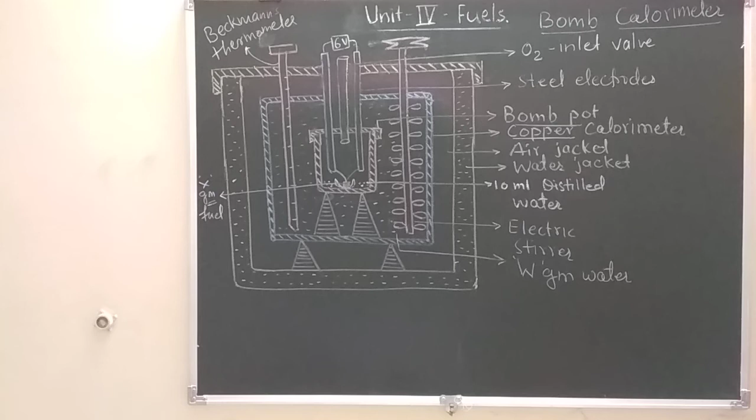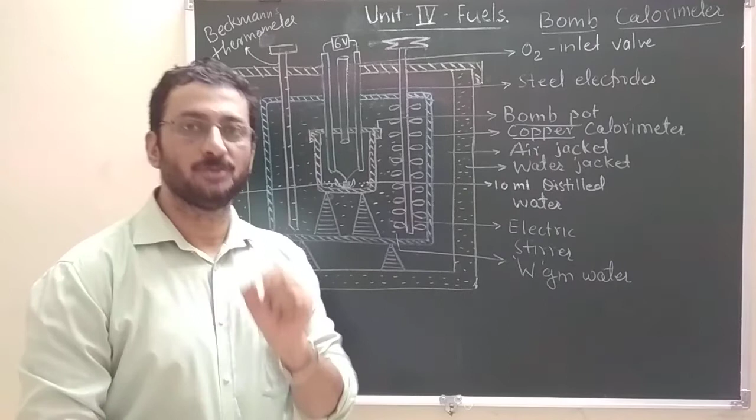After calorific value, the next topic is measurement of calorific value. This is one apparatus called the bomb calorimeter. Calorific value of solid fuels and non-volatile liquid fuels can be measured with the help of a bomb calorimeter. This is a rough construction of the bomb calorimeter, which is the correct construction, but not to scale.

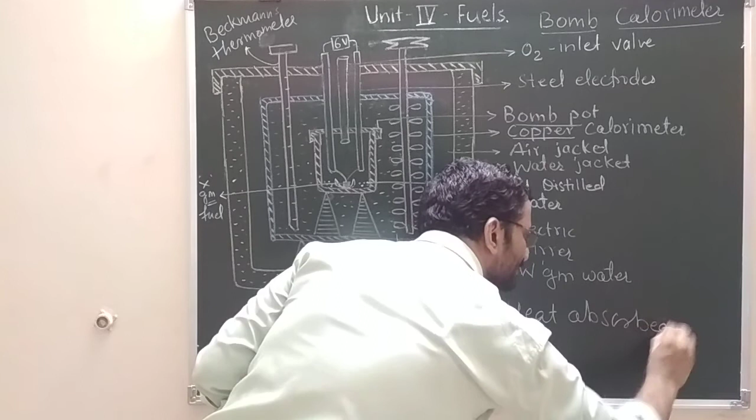Let us see the main components of the bomb calorimeter. Before that, what is the basic idea of measurement of calorific value? The basic idea is: heat liberated. Who is liberating heat? Some known mass of fuel will be liberating heat in this experiment. It will be equal to heat absorbed. We will see that part. In this lecture we will be studying the 6 marks short note on bomb calorimeter.

Let us see the construction first. Main components of the bomb calorimeter: this is the central component, this is the second envelope, blue color, and this is the third envelope. This central compartment is called the bomb pot. This is a stainless steel pot, which withstands high temperature and high pressure. In this bomb pot there is a place to keep a crucible, a steel container.

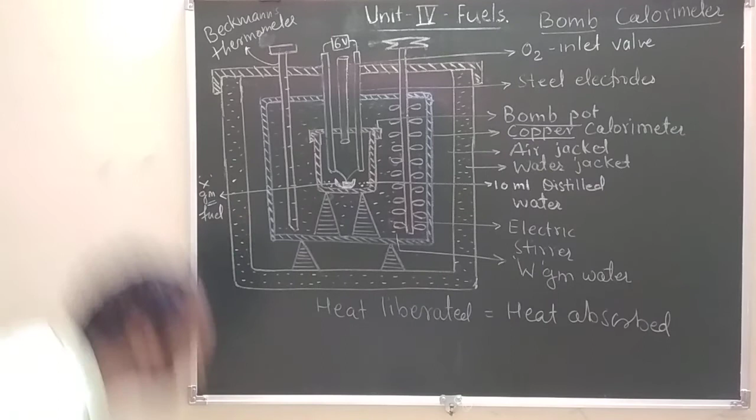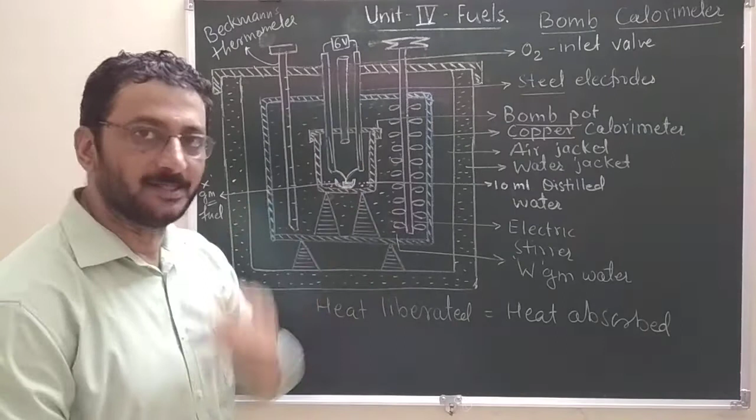In that container we have taken a known mass of fuel, say X gram of fuel. This fuel sample is connected to these two steel electrodes via fuse wire. So in a bomb pot, which is a small steel container, there is a place to keep a crucible. In that crucible we are taking a known mass of fuel, say X gram of the fuel.

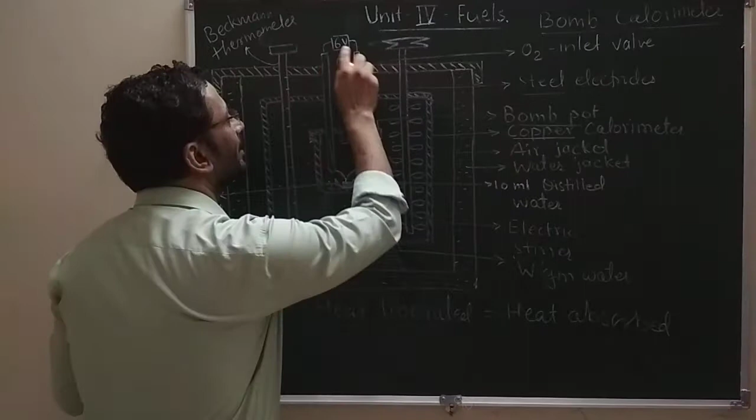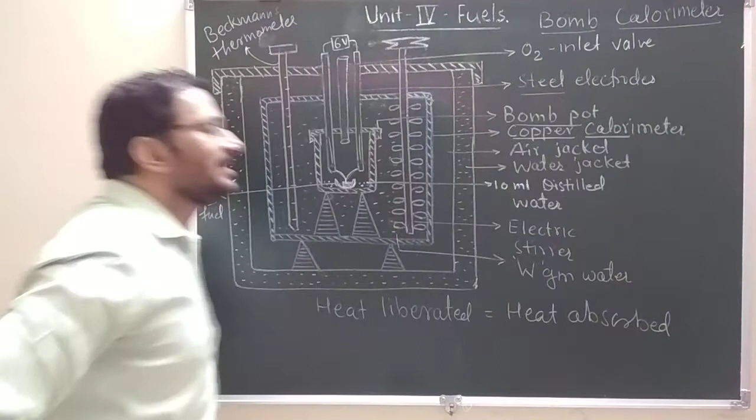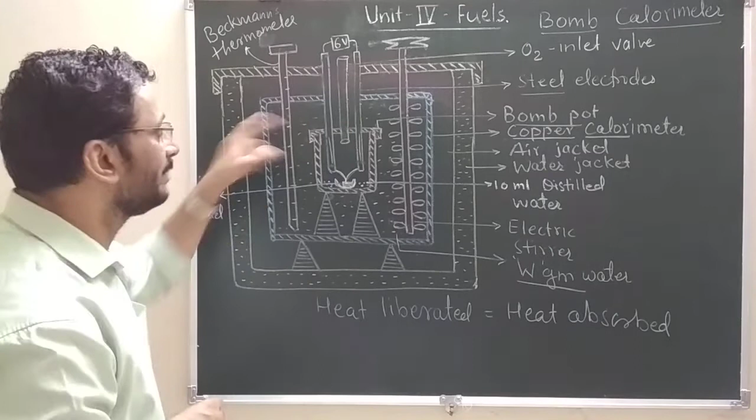This fuel is connected to steel electrodes via fuse wire, and these steel electrodes are joined to the battery, a 6-volt battery. This bomb pot is immersed in the second compartment, the second envelope, called the copper calorimeter. This is a copper container. This copper calorimeter contains, suppose, capital W gram of water. A known mass of water is kept in the copper calorimeter, in which you have immersed the bomb pot.

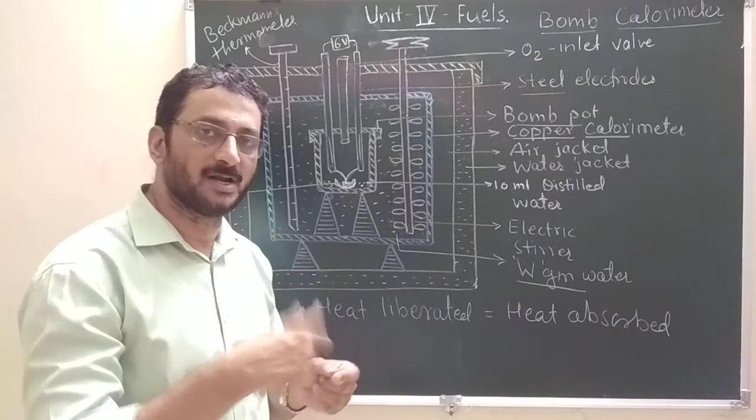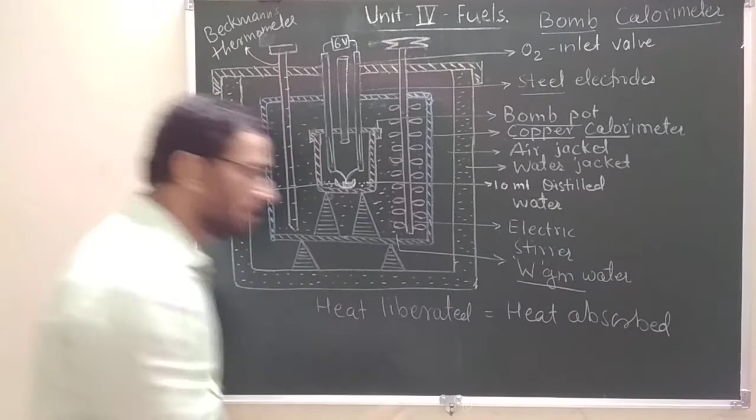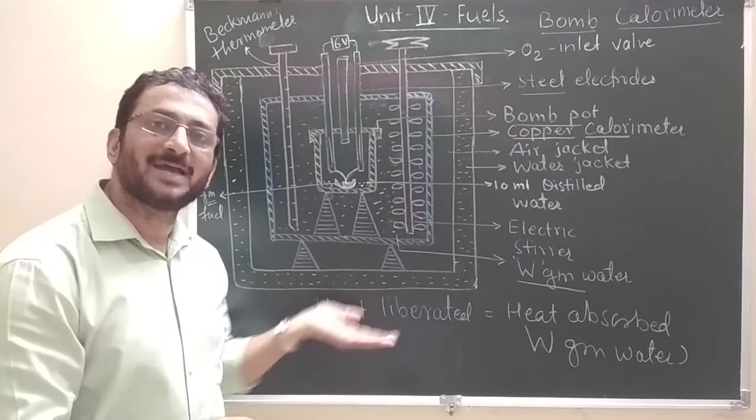So when you pass current from this battery via electrode and fuse wire to the fuel sample, the fuel sample will catch fire and start burning. On its combustion, a certain amount of heat will be liberated. Here X gram of the fuel is liberating heat. This liberated heat will be absorbed by capital W gram of water. By absorbing heat, there is some rise in the temperature, which will be recorded by this thermometer.

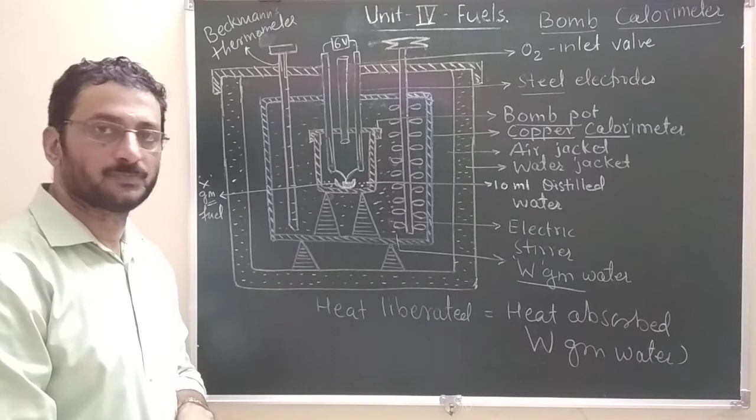This is a Beckmann thermometer that is used to record the rise and fall of temperature. By absorbing heat by the water, there is a rise of temperature. We will record the minimum temperature, suppose T1, say 25 degrees centigrade, and the maximum temperature, suppose 72 degrees centigrade. So minimum to maximum will be recorded.

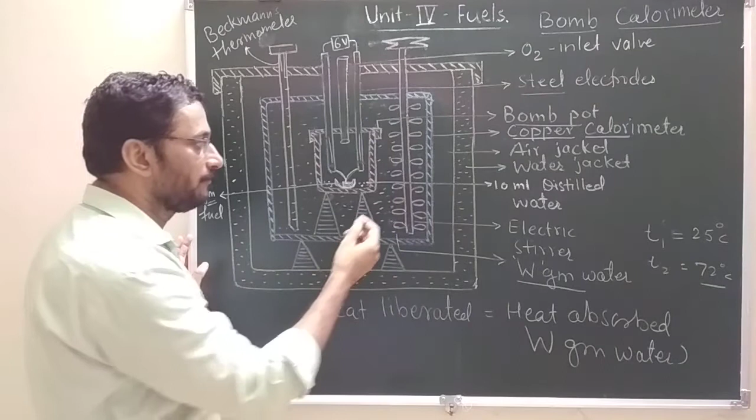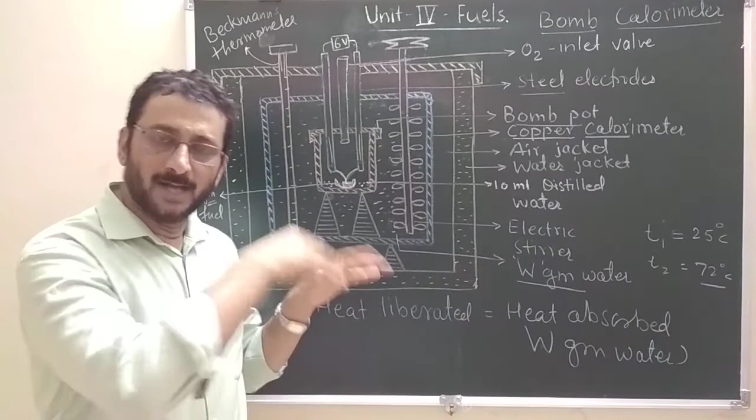In this copper calorimeter there is an electric stirrer for uniform stirring of the water. And there is an oxygen cylinder for proper smooth combustion, supplying oxygen at the given pressure. The copper calorimeter is enveloped by an air jacket and then a water jacket. The copper calorimeter containing W gram of water, which absorbs heat from combustion of the known mass of fuel sample, is covered by the air jacket and water jacket to avoid heat loss by radiation.

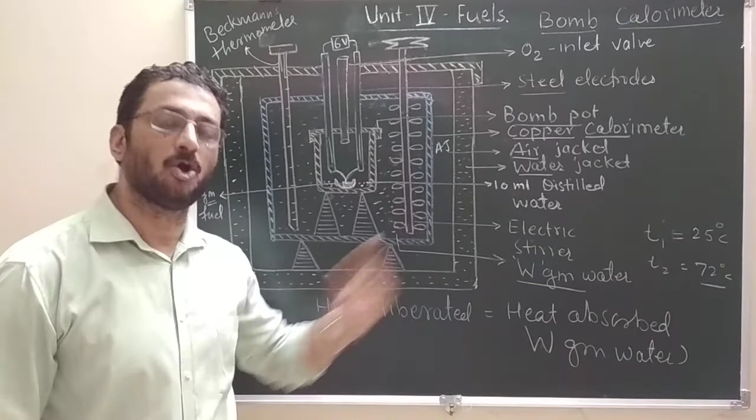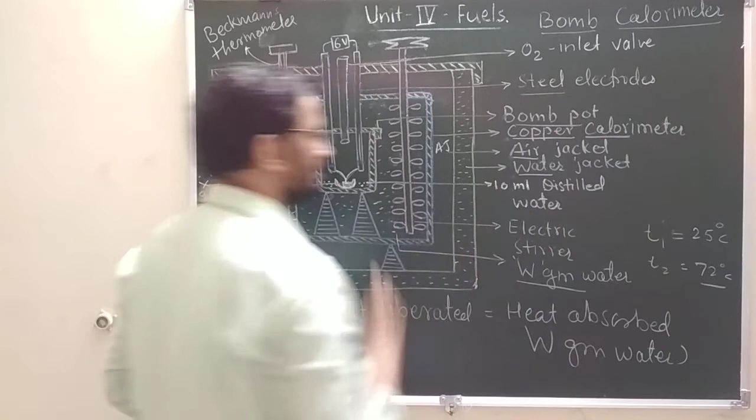This is a rough construction of the bomb calorimeter. The main components are the bomb pot, copper calorimeter, air jacket, and water jacket. Then there are the fuel sample, electrodes, oxygen cylinder, thermometer, electric stirrer, and so on.

One more important point: in the bomb pot where you have kept the fuel sample in the crucible, we have taken 10 ml of distilled water, because when the fuel sample contains sulfur or nitrogen, during combustion it will form the corresponding oxides of sulfur and nitrogen.

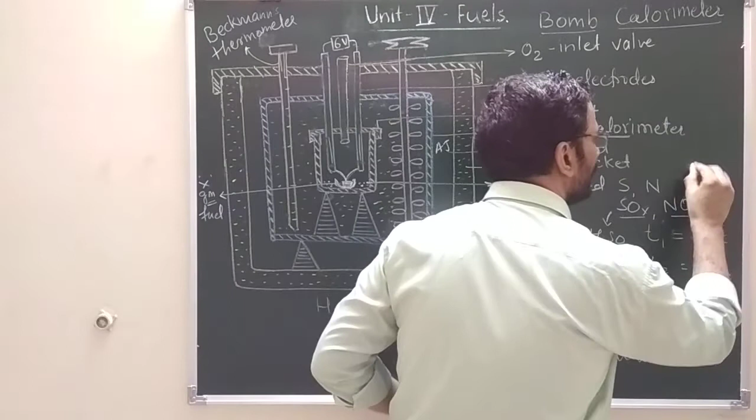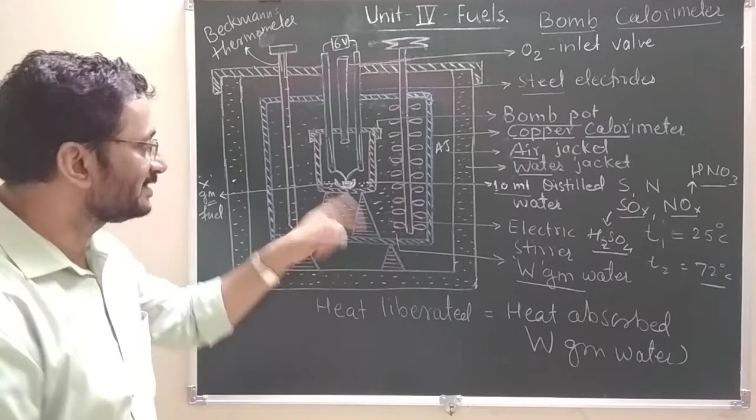Okay, these oxides get dissolved in this water and they will form corresponding acids like sulfuric acid, or with water it will form nitric acid, and so on, right? So formation of acid is an exothermic reaction. Formation of acid due to presence of sulfur and nitrogen in the fuel is an exothermic reaction.

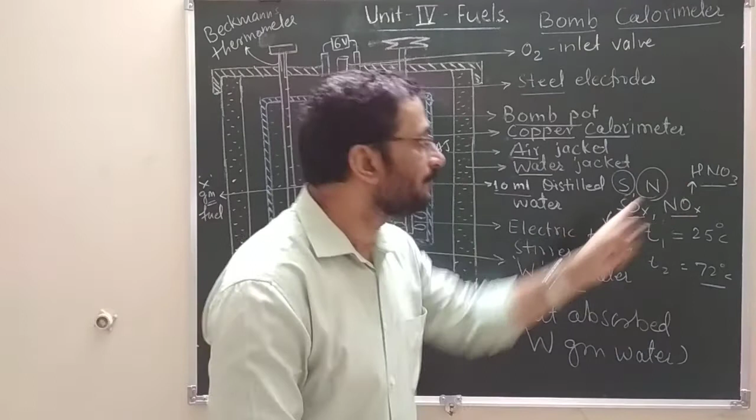Heat will be liberated, but that heat is not because of the burning of the fuel sample. That will be because of formation of acid from sulfur and nitrogen. We will record this afterwards. So for that purpose 10 ml water is kept. What is the purpose? This 10 ml water is kept in the bomb pot, and if the fuel sample is containing

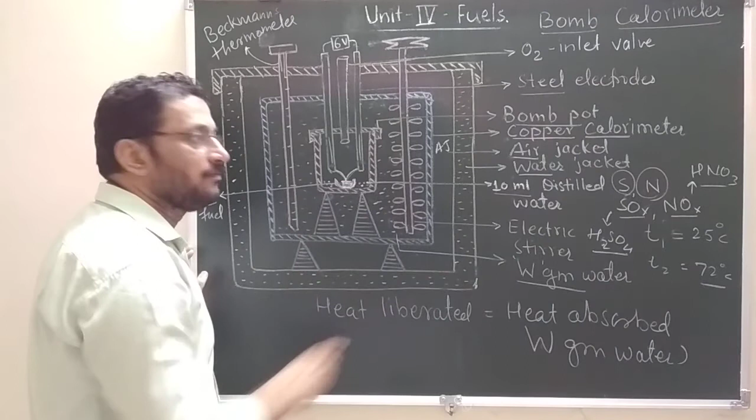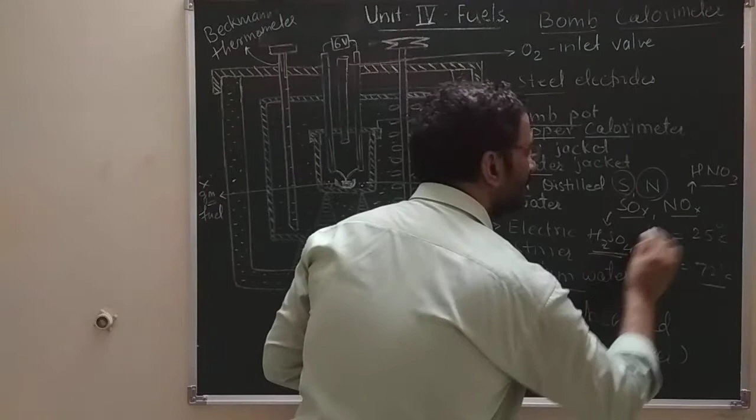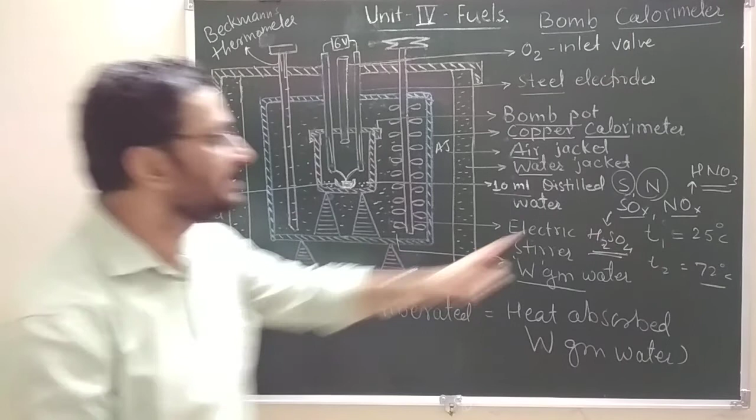sulfur and nitrogen, on combustion of the fuel sample, they will form corresponding oxides. These oxides get dissolved in the water and they will form corresponding acids, right? Formation of acid is an exothermic reaction, so a certain amount of heat will be liberated. That heat is not because of the burning of the fuel sample, that is because of these two components, or formation of acid actually. Fine.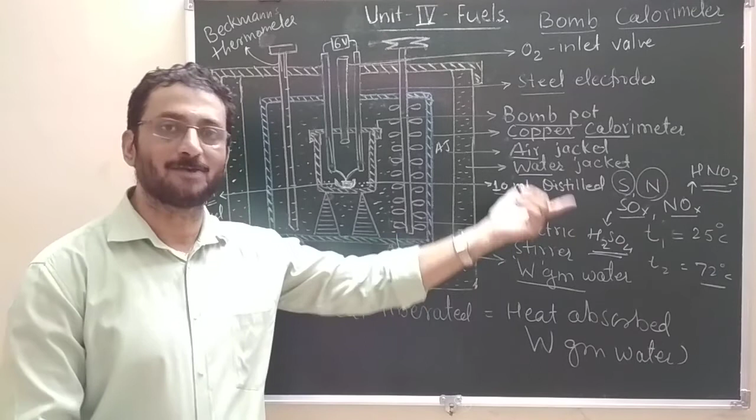So that part we will be taking in the calculation part. We'll see afterwards. So this is the construction of the bomb calorimeter. Fine. Now see the working of the bomb calorimeter.

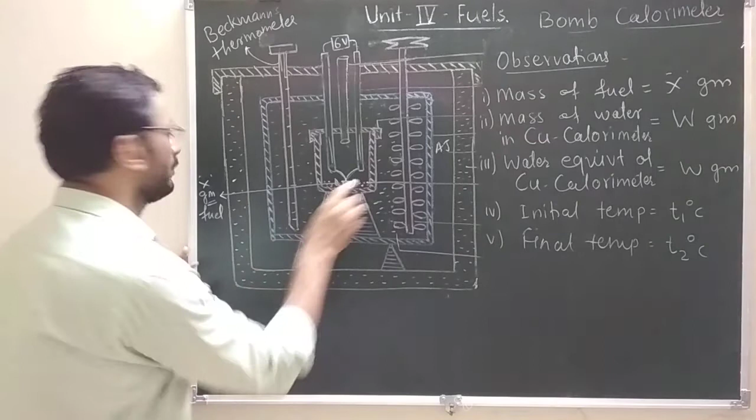Okay, we will arrange the assembly like this. In a bomb pot we will take x gram of the fuel and 10 ml water. We will immerse the bomb pot in a second compartment, that is the copper calorimeter. In this copper calorimeter we have taken a known mass of water, that is capital W gram. We will arrange the thermometer and electric stirrer, and record the initial temperature.

Okay, now we will pass current for a few seconds, that will reach the fuel sample via the fuse wire. It will start combustion. There will be generation of heat. That heat will be absorbed by this capital W gram of water kept in the calorimeter. There will be a rise in the temperature of this water, which will be recorded by the Beckmann's thermometer.

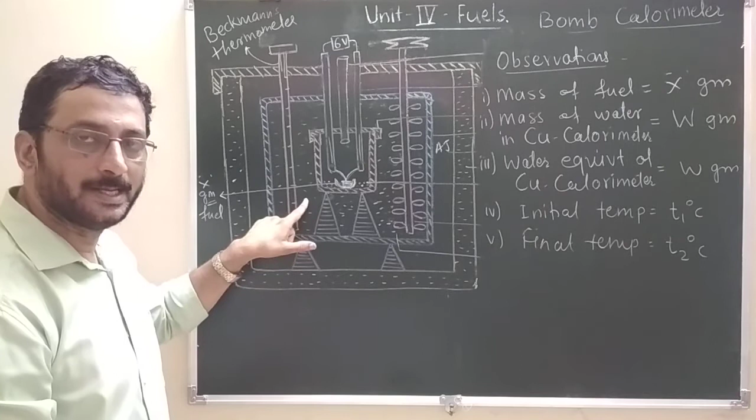From the mean rise of temperature of this capital W gram of water kept in a copper calorimeter, by doing a simple calculation, we can easily find out the calorific value of the fuel. For that purpose we have to record our observations.

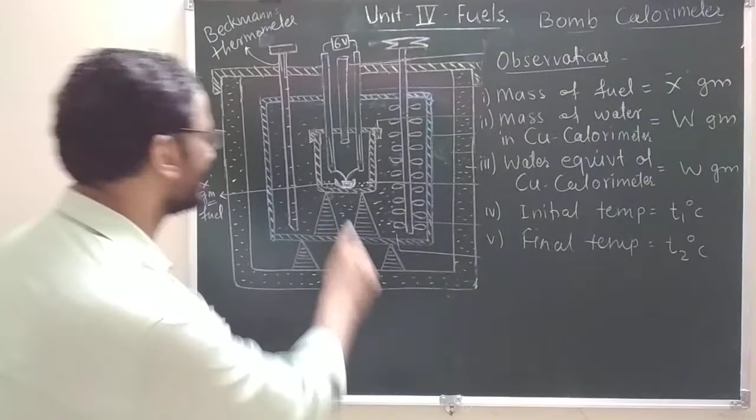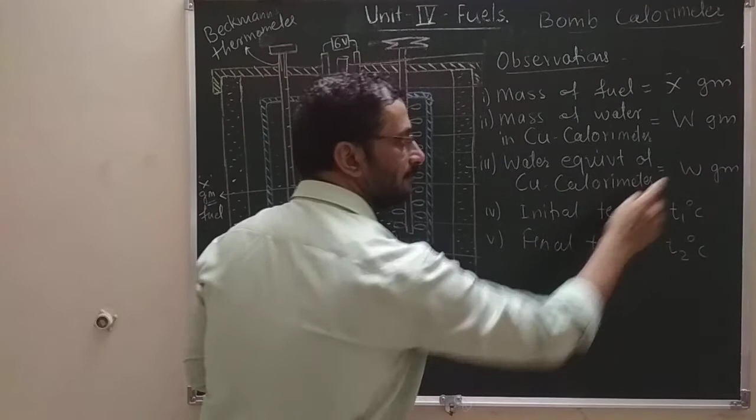What are the observations? Mass of the fuel kept in a bomb pot is x gram. Mass of the water kept in a copper calorimeter is capital W gram. Water equivalent of copper calorimeter is small w gram. We'll come to that. Initial temperature, suppose T1, that is room temperature. Final temperature, maximum temperature, is T2 degree centigrade.

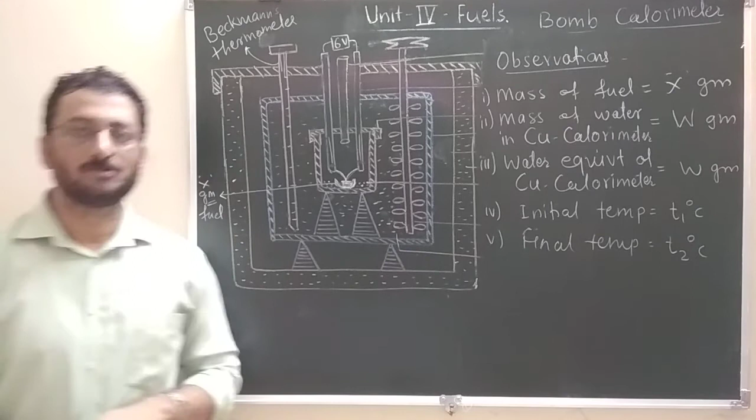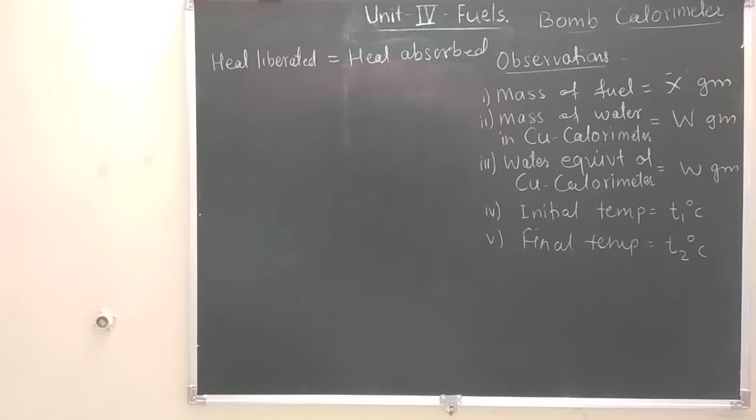From these observations, by doing a simple calculation, we can easily find out the gross calorific value of the fuel sample. Okay. Now, after these observations, see the calculation part. What are the observations? Mass of the fuel taken is x gram. Mass of water kept in a copper calorimeter, which is going to absorb heat, is suppose capital W gram.

Water equivalent of calorimeter. What is this water equivalent of calorimeter? Apart from the water kept in a copper calorimeter, the other components of the apparatus may also absorb heat. Maybe the copper container itself, a metal part, it may be the electrical stirrer, it may be the bomb pot and so on. So that factor is taken as the water equivalent of copper calorimeter.

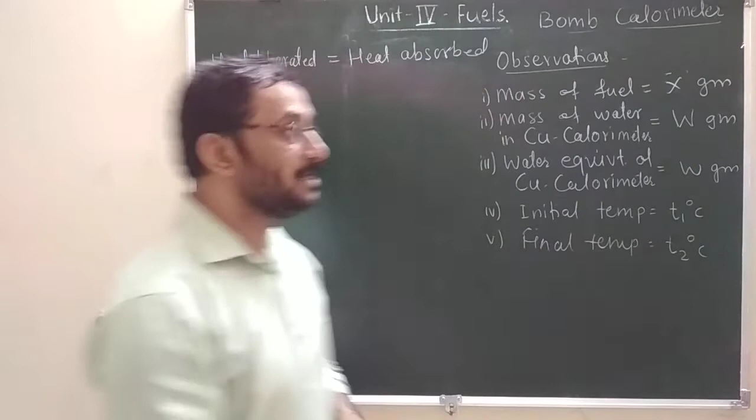How to record this? Mass of the apparatus which is absorbing heat into specific heat, that is recorded as small w. That we have to take into consideration, because the rise in temperature is because of heat coming from the fuel sample, and this is the initial temperature and final temperature.

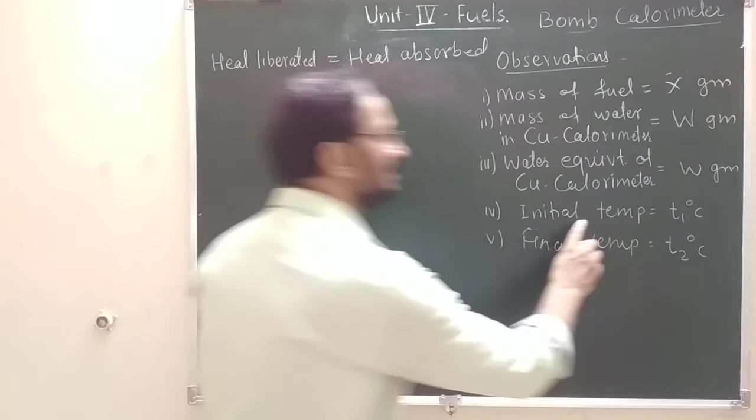Before going to the calculation part, see the basic principle of the bomb calorimeter. The basic principle is heat liberated by a known mass of fuel is equal to heat absorbed. And from the mean rise of temperature we can find out the CV. One more observation is our GCV. Suppose the GCV of the fuel is theta.

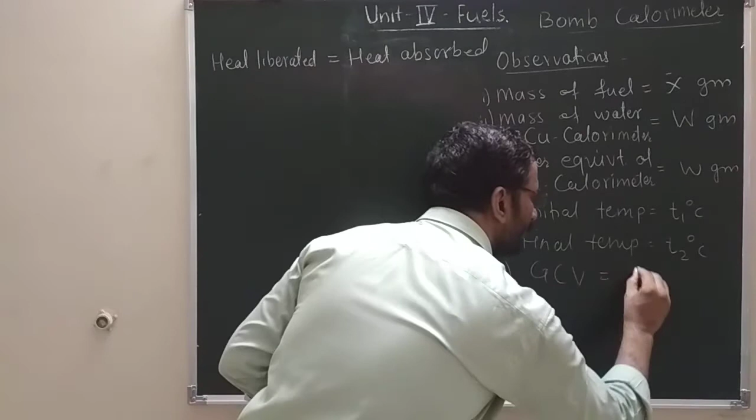Okay, who is liberating heat? X gram of the fuel is liberating heat, and we are recording that heat in the form of theta. So x theta GCV is equal to what? Heat absorbed by capital W gram of water. So capital W kept in the calorimeter plus small w, that is the water equivalent of calorimeter, other parts of apparatus absorbing heat, into what?

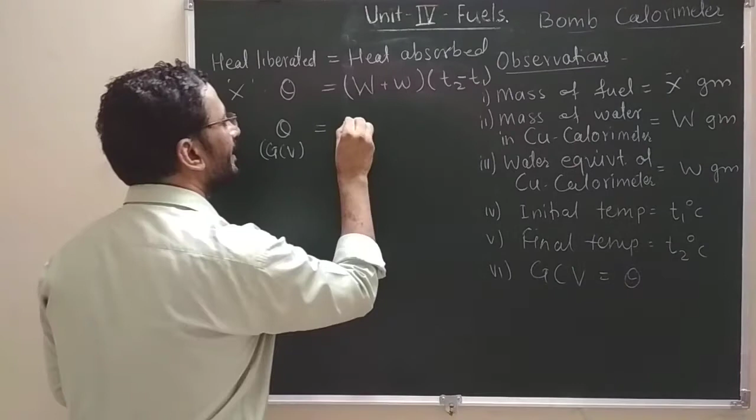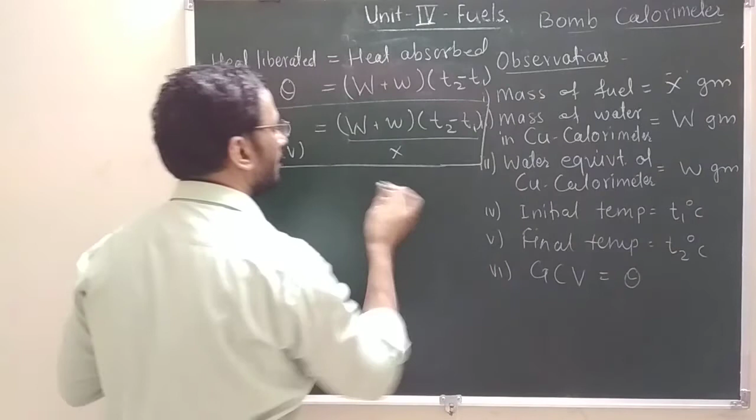Mean rise of temperature T2 minus T1. So from this simple observation, theta, that is GCV, can be easily recorded. It is capital W plus small w into T2 minus T1 divided by x, x gram of the fuel. This is the equation. From this we can find out GCV; the unit is calories per gram, or it may be kilocalories per kilogram. This is the one equation we are getting.

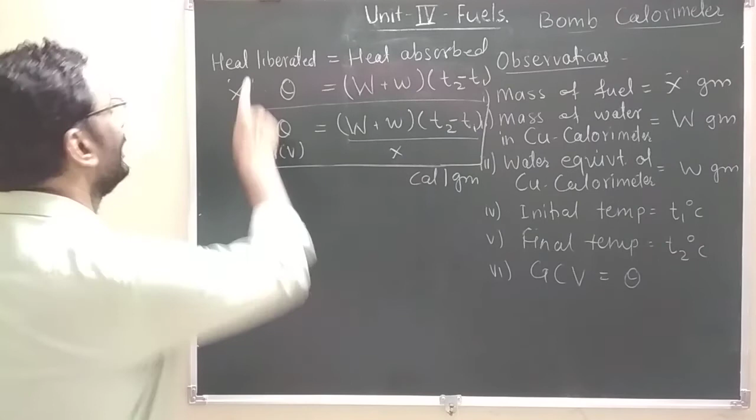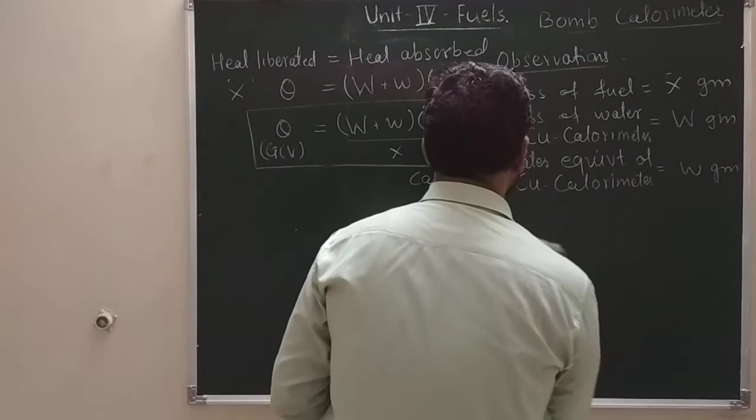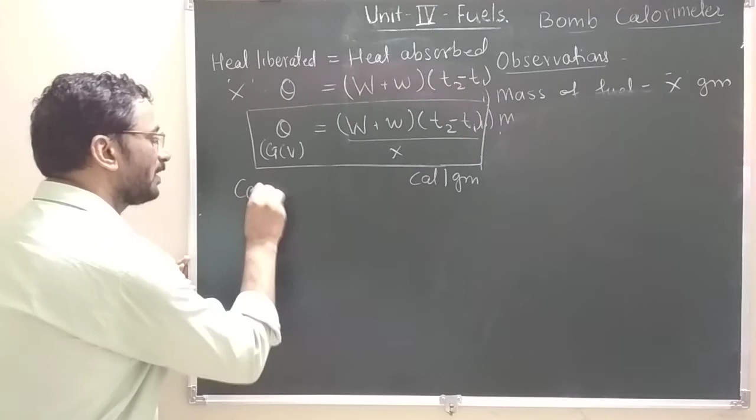Okay, heat liberated by x gram fuel, recorded as GCV, equals heat absorbed by water plus water equivalent of calorimeter into rise of temperature. From this simple observation we can easily find out the GCV of the fuel sample. Okay, now bomb itself has given some corrections. So corrected formula, we can say. What is the corrected formula? What are the corrections he has given?

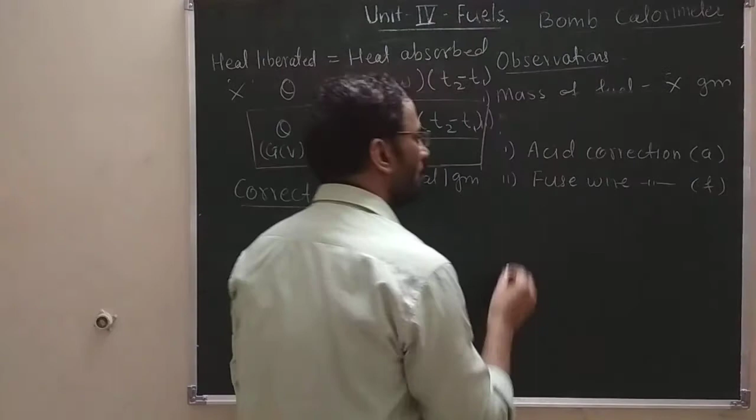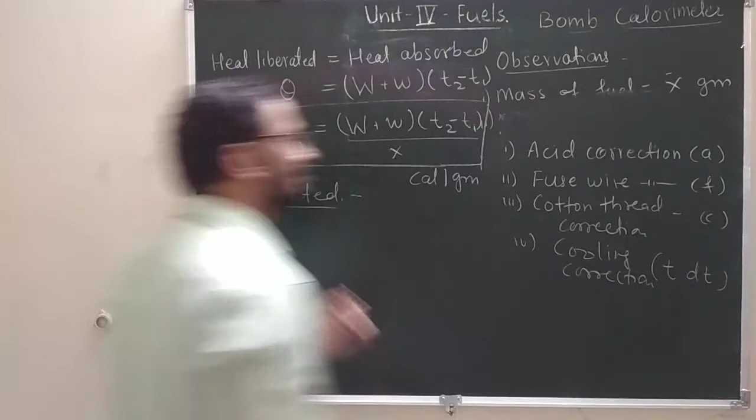First correction is called acid correction, noted as a. Second correction is called fuse wire correction, noted as a small f. And third is cotton thread correction. You may record it as notation small c. And last correction is called cooling correction, that we will record as t dt. So let us see what are the corrections they have given, and accordingly how the formula changes.

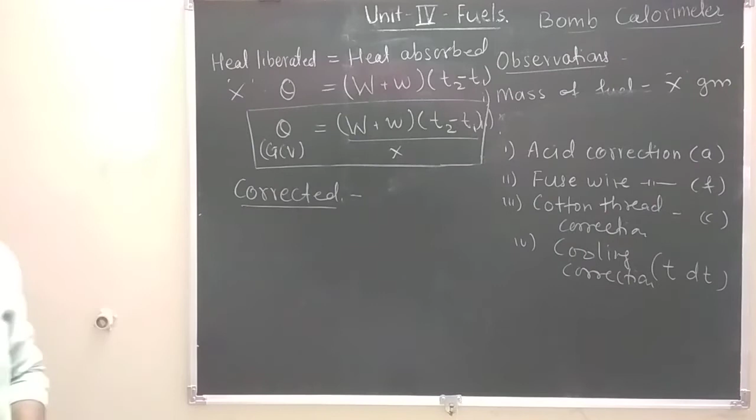So first correction is acid correction. We have already seen in a bomb pot we are taking 10 ml distilled water. So if fuel is having nitrogen or sulfur, on oxidation they form oxides, dissolved in that 10 ml water, form acid. That acid formation is an exothermic reaction. Some heat is liberated, so that acidified water after the experiment will be titrated with standard base. How much of base is required? From that we can find out how much of heat is liberated. That is recorded as small a.

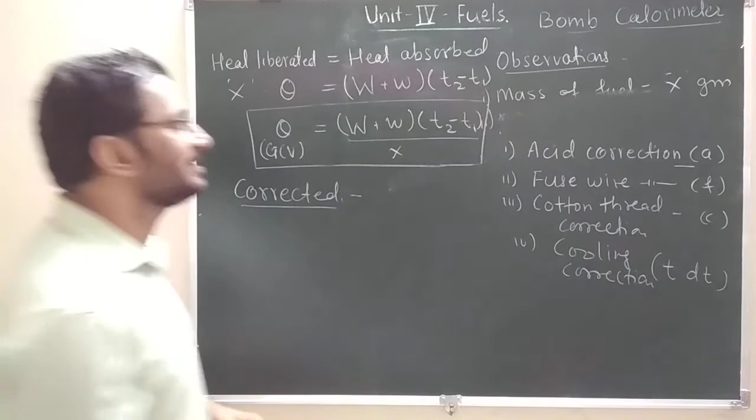So that acid correction part is the heat liberated by forming acid, not from the fuel. So it should be made minus. It should be subtracted from the equation.

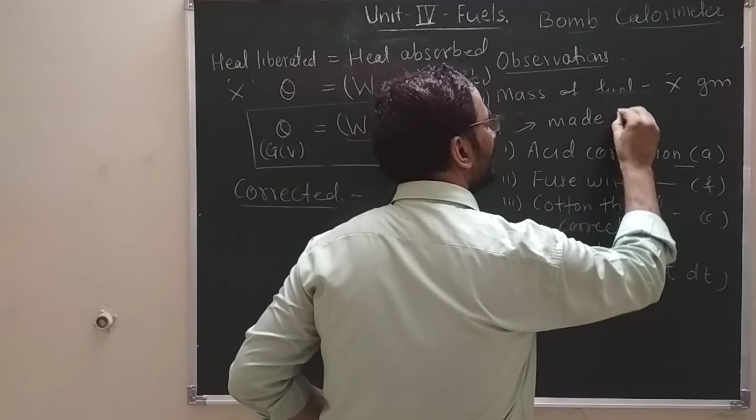Then fuse wire correction. What is fuse wire correction? When you pass current from the electrode to the fuel sample via fuse wire, there may be heating up of the fuse wire. So that heated wire may radiate some energy, energy that is basically by heating up of the fuse wire. That heat is not from burning of the fuel sample. It is by heating up of the fuse wire. So that value also is to be subtracted from the equation. That is the second correction.

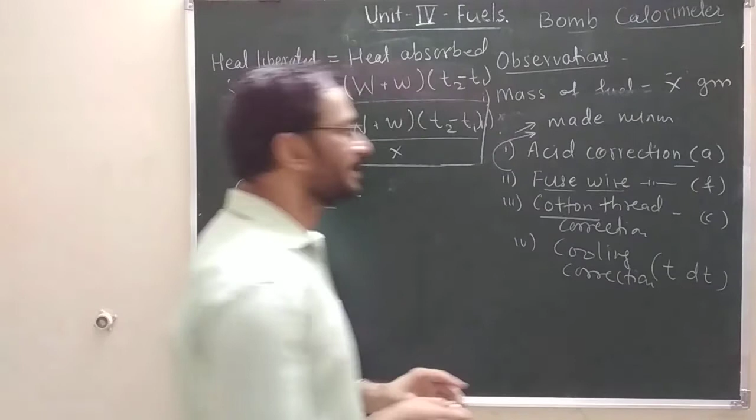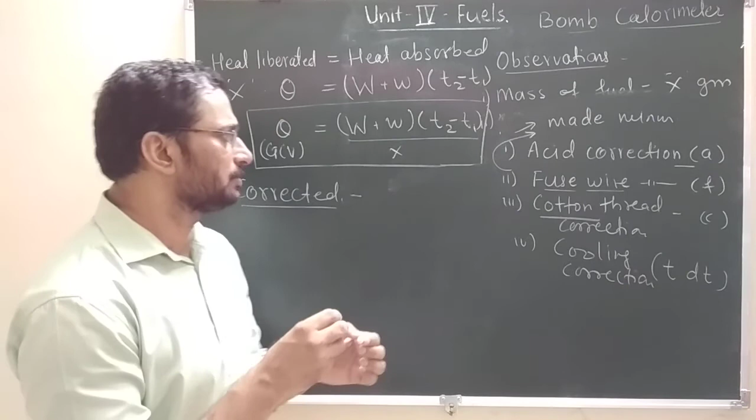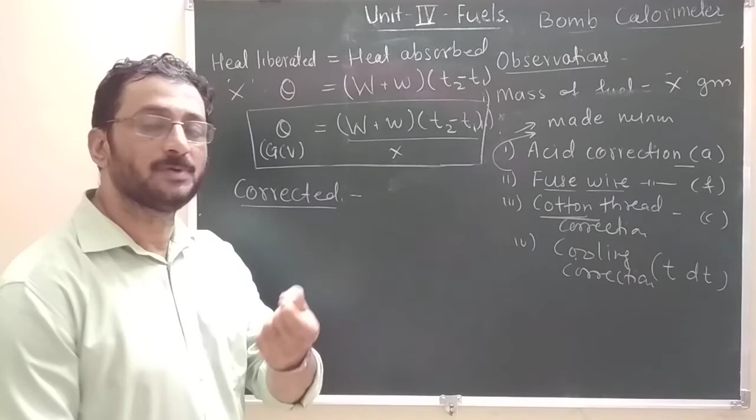Third is cotton fiber correction. What is cotton fiber correction? Suppose this is my fuel sample. So to have a minimum ignition temperature, so that at a low temperature it should catch fire, this fuel sample or coal sample I will wrap in a cotton fiber. By heating up the cotton fiber, the fuel will catch fire easily. So burning of a small amount of cotton fiber may generate heat, but that heat is not from the fuel sample. So this correction also should be made minus, should be subtracted.

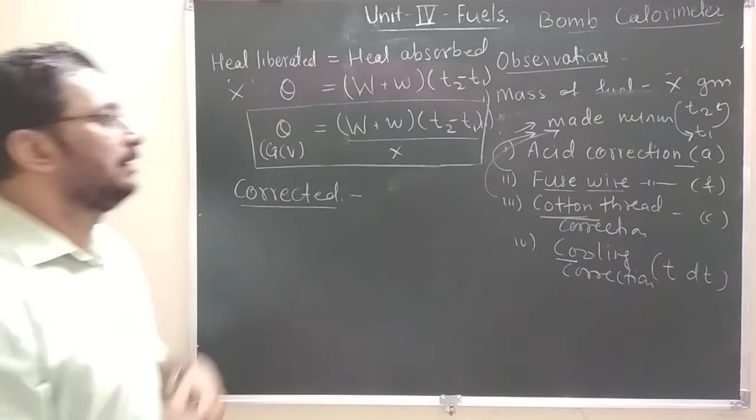And lastly, cooling correction. So T1 to T2 is the rise of temperature. Again we will be going from higher to lower temperature, from maximum to minimum temperature. Suppose our cooling rate is dt per minute and time required for cooling is t minute. So t dt is my cooling correction. That factor should be added in the equation.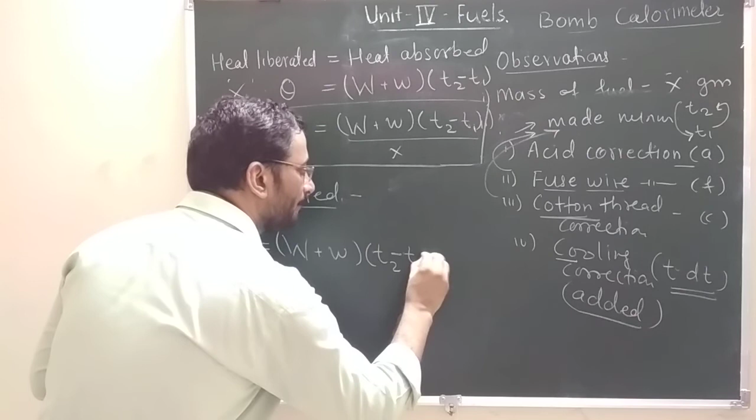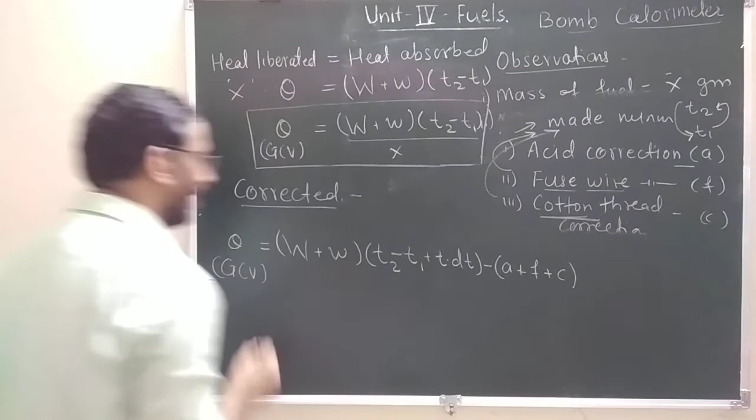So after the corrections, GCV, that is theta, is equal to mass of water plus water equivalent of calorimeter into T2 minus T1 plus cooling correction TDT, minus acid correction plus fuse wire correction plus cotton thread correction. So these are the four corrections. One is added, three are subtracted. This is our final formula, called the corrected formula of the bomb calorimeter.

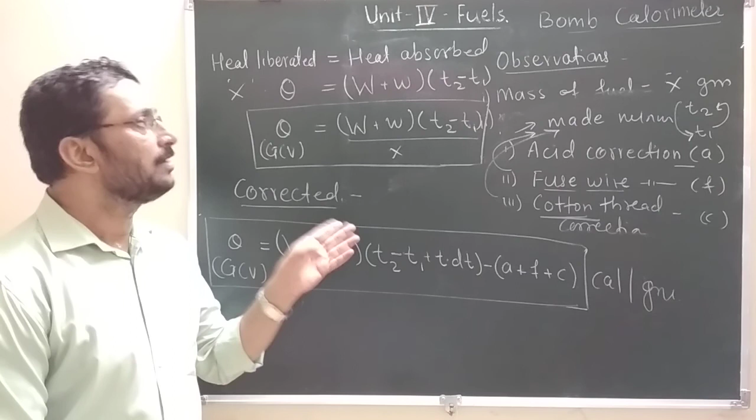Again the unit is calories per gram, or kilocalories per kilogram. This is one simple short note for 6 marks on a bomb calorimeter. This way we record the CV, calorific value of solid and non-volatile liquid fuels. I hope you have understood.